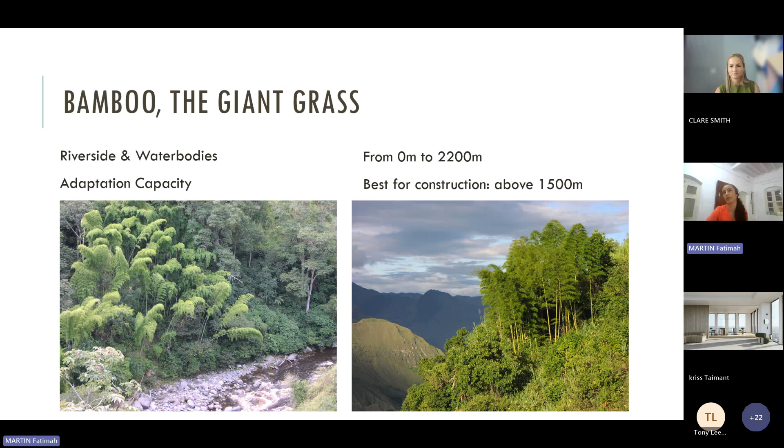As you may know, we basically find bamboo in places where there is water, either on the sides of rivers, but we also find it in many rainforests. The best bamboo to construct with is the one we find on hills above 1,500 meters. In the Mauritian context, we have basically 3-4 species of bamboo, and in the plains is where we find the most suitable bamboo for construction, even though it's a very small size.

Bamboo is distributed all over the tropical and subtropical belt. So when we think about bamboo, maybe we think about 1-2 plants, but actually it's a family that consists of more than 1,500 species, out of which around 300 we can call giant bamboo. Giant bamboo will basically be bamboos that have poles of around 10 centimeters.

So a very brief view on environmental benefits: bamboo is a champion in this. Bamboo has a very high percentage of CO2 fixation—no tree can compete with it—and in biomass production. So it has many applications for production of energy.

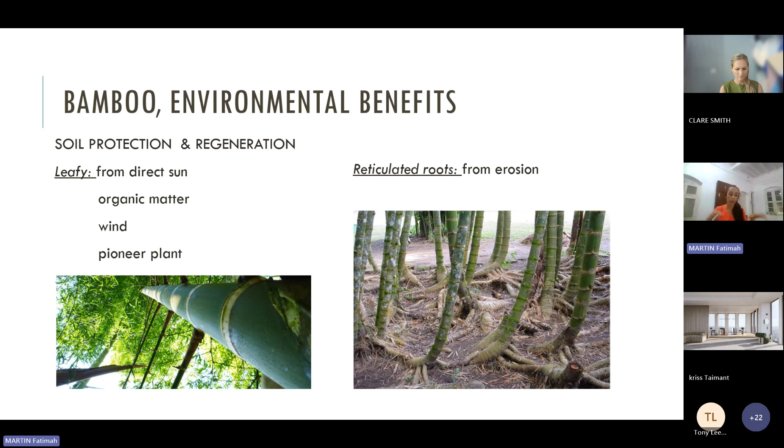Bamboo is also a great agent to regenerate damaged and eroded soils. As it's a plant that grows so quickly, it produces shade very fast, and it will enrich the soil with its leaves. It also becomes a wind protection for other plants to grow, providing this protection. It will also produce all this biomass organic matter, and with its reticulated roots, prevent erosion of soil.

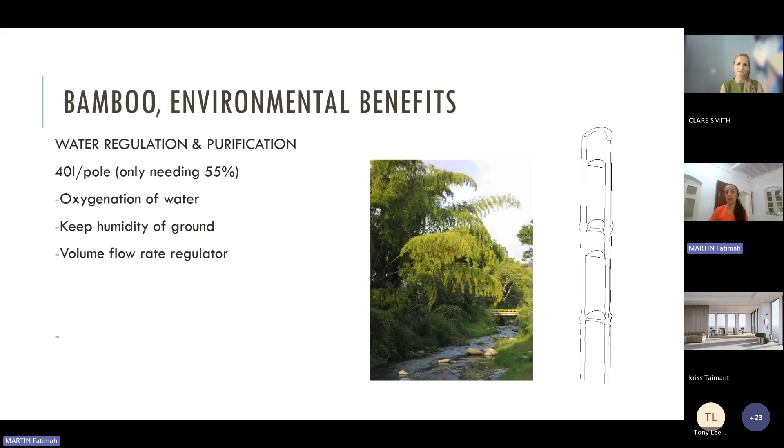It also has great properties for water cleaning and restoration of riversides. Bamboo will oxygenate the water, and unlike what some people think, saying 'I don't plant bamboo because it will absorb all the water of the ground and dry other plants' - that's a big lie. What happens is bamboo has an amazing capacity to store water inside of it. So the concept is more like you are enlarging the water retention capacity of a soil when you plant bamboo.

When we are looking at a bamboo plant, we may have a very big confusion. Bamboo is not a tree. Bamboo is a giant grass. So when we look at a picture like this on the right, we may think we are looking at independent plants, independent trees - not at all. This is a single plant with interconnected roots, and a bamboo plant can extend for hundreds of meters, actually.

We will find mainly two big families of bamboo. We have what is called monopodial bamboo, which has a linear running root, and from this root several poles will grow at a certain separation from each other. Then we have the bamboo we find more in the subtropics, the bamboo we find in Mauritius mostly, which is sympodial bamboo that grows in bundles. In this case, the roots - the rhizomes - grow against each other, resulting in these bundles. And sympodial bamboo tends to curve more than monopodial.

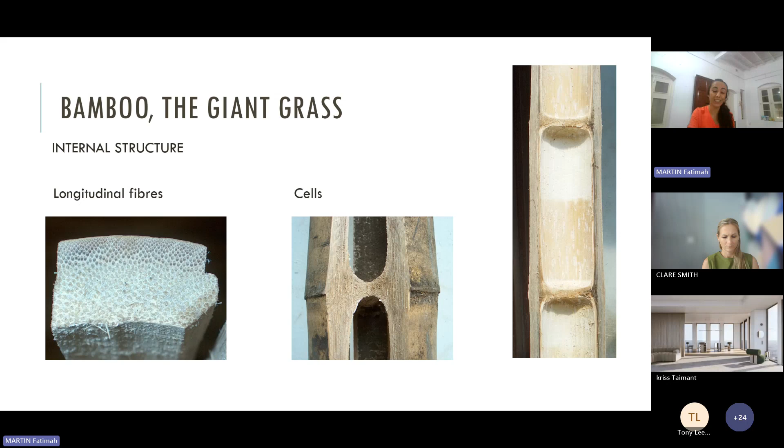In this bamboo wall, I want to show you these small black dots - these are all the fiber systems. That is the way you will realize how much bamboo is around your life. Probably 95% of your kitchen - the cutting board, or knife, or a spoon, or whatever - it will for sure be bamboo and not wood. The way you can identify it is by looking for these dot spots, the black spots, which are the fibers.

I don't want to go into much detail, but there is a certain fiber distribution in the bamboo which is not even. I've left some slides here for the record, so if anybody wants to come back to this in more detail, these are some principles. For example, we find much more fibers in the outer part of the bamboo than in the inner part.

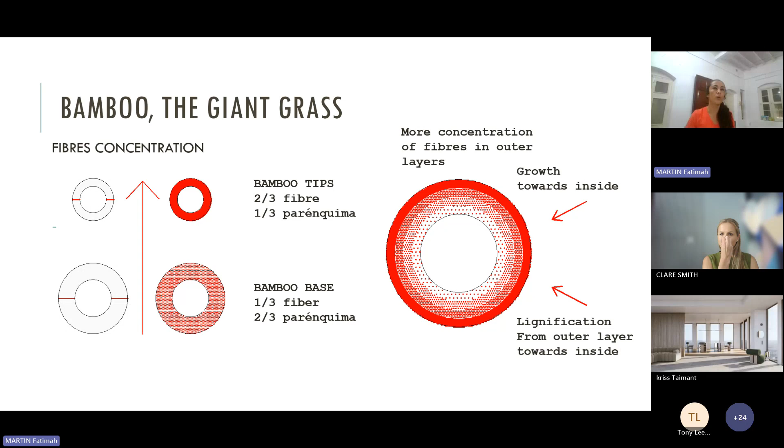When bamboo grows, basically it will grow to its full length with its final diameter very quickly, in the first 5 months to 1 year. Then it will slowly increase the thickness of the walls towards the inside until it reaches its maturity, which may be after 3 years. That is why the outer part of the bamboo is the eldest - it's the one that receives the sun, produces lignification, and you get all these fibers.

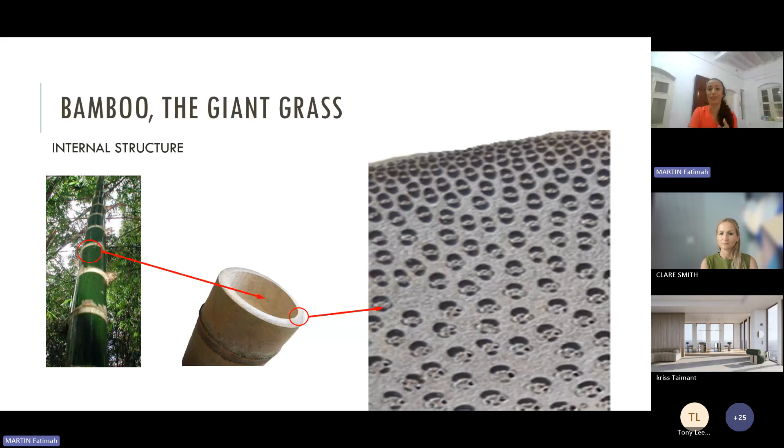That's why when you go towards the inside, when you open a bamboo, it is very soft inside and very hard outside. So we should never remove the outer part of a bamboo and remain with the inner one - that would be a very big mistake, going against the nature of the bamboo.

A big difference between bamboo and wood is this: in wood, apart from longitudinal fibers, we find growing rings—annular fibers forming circles as it grows—and medulla rays, which are basic radial fibers. So the mechanical behavior of wood is very different from bamboo. Bamboo can be more associated with metal, even a metal tube, than wood.

Having only longitudinal fibers is a very important thing. Bamboo works best at normal stresses—compression and tensile stresses that go along the fiber. So when we think about torsion or flexion stresses, those are the moments where we have to be extra careful, and where bamboo will not be as competitive as when it's working in compression or tension.

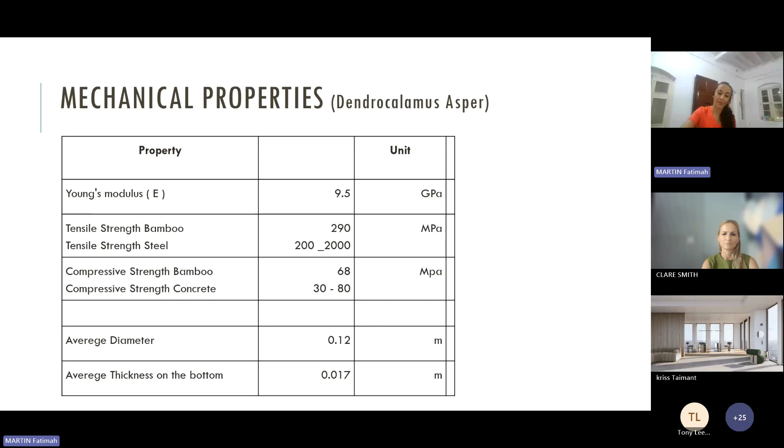I don't want to talk about the numbers again, I leave this for the record. But mainly, I want to say that bamboo, apart from its environmental benefits and its quick rate of growth, it's an amazing ally for earthquake and cyclone resistant architecture, due first of all to its flexibility.

The bamboo, due to this flexibility, is able to achieve very high deformations before it collapses. Even in case of collapse, due to its lightness, the damage it creates is much less than with any other, heavier material. Also, due to its flexibility, we can achieve in a very easy and natural way aerodynamic shapes that, as we'll see, behave very well against cyclones and wind stresses.

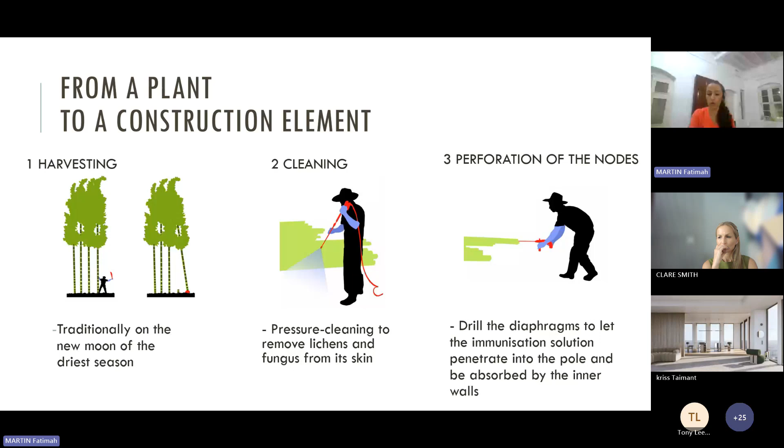When we want to think of bamboo as a construction material, first there is a certain procedure to follow. I won't get into details, but basically there are certain manners of how to harvest the bamboo. The bamboo needs to be cleaned, then treated with certain salts and chemicals—eco-friendly ones. To do so, we first need to perforate the internal walls of the bamboo, the diaphragms, making a longitudinal perforation. There are different methods.

The most common method is called the immersion method. We have a pool where we immerse the bamboo for around 10 days to 3 weeks, depending on the concentration of boric acid and borax used. These two chemicals produce a salt together that prevents the bamboo from future attacks of insects and fungus. Among other reactions, the pH of the bamboo, which is acidic, becomes more alkaline—and fungus and many other microbes will not reproduce on an alkaline medium, only on an acidic one.

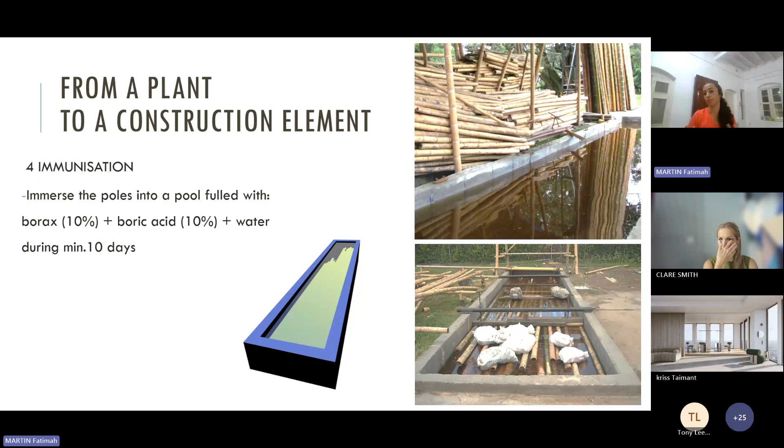So we are going to see quickly some different approaches to bamboo structures. I'll start by presenting something more traditional, in the sense of thinking about beams and columns—what we call 2D structures.

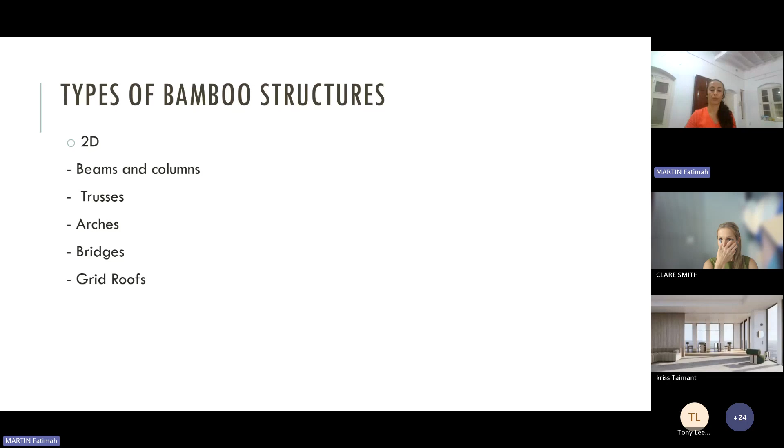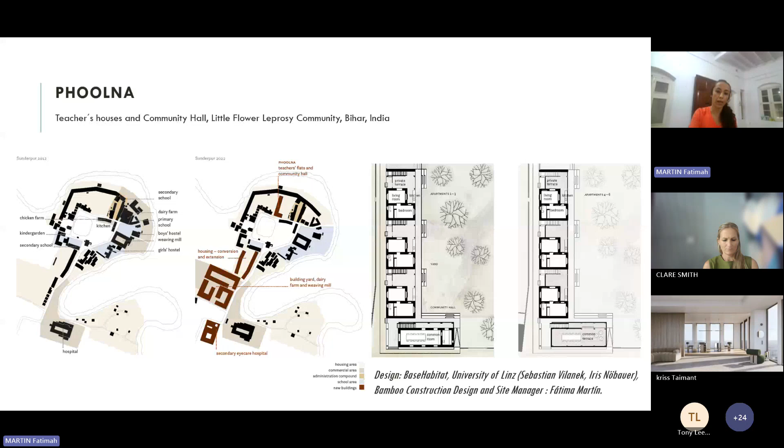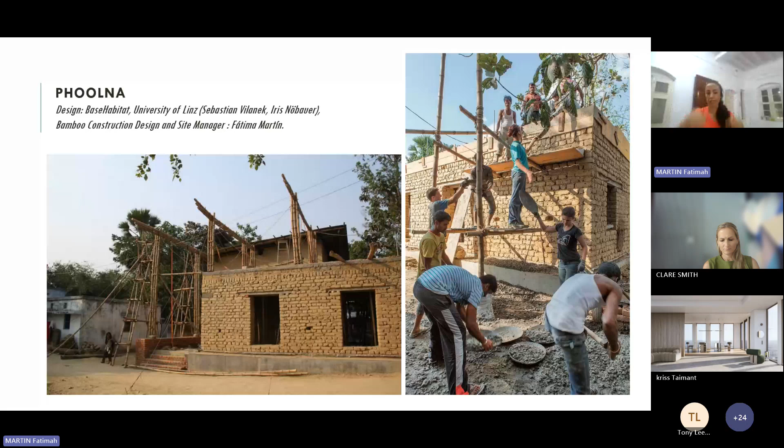This is a construction in Bihar, India, designed along with the University of Linz, with Sebastian Vilanek and Iris Nöbauer. It combined adobe bricks, as you can see, with a bamboo structure. When I say a 2D structure, I mean columns connected with beams, rafters, and purlins, as if we were working with any other material—concrete, wood, or anything else. In India, unlike in Mauritius, we need to calculate for around 100 to 120 kilometers per hour.

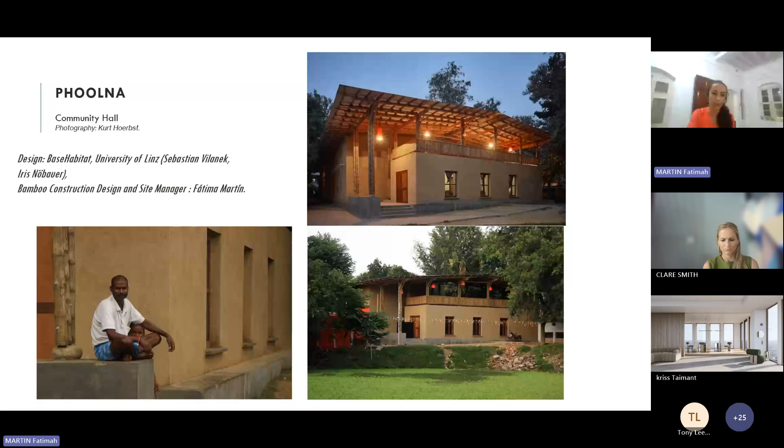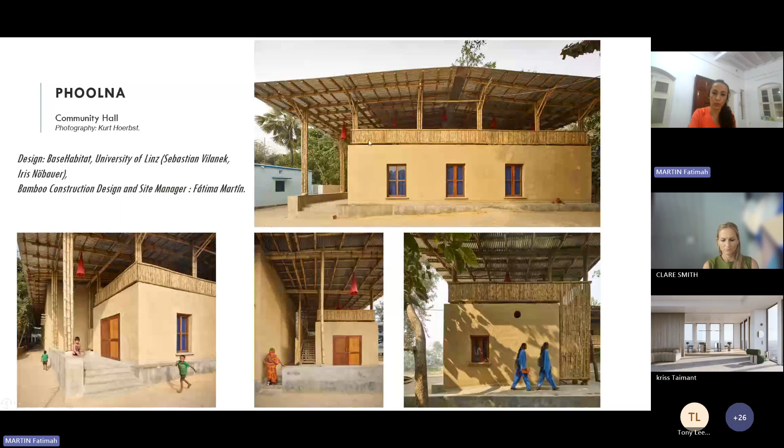In Mauritius, as you'll see later, we need to calculate for 300 kilometers per hour, so you'll see the difference between these structures and the ones developed in Mauritius. I'll move a little quickly so we have enough time to go into details later. As you can see here, I also used bamboo to make the veranda—using split bamboo—and also to do the flooring for the terrace.

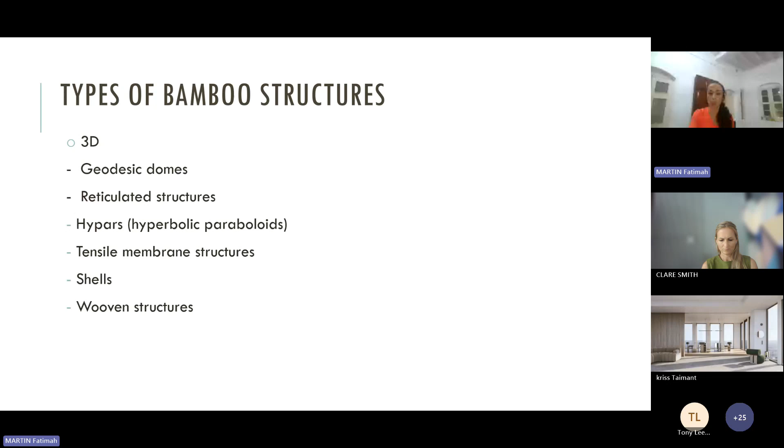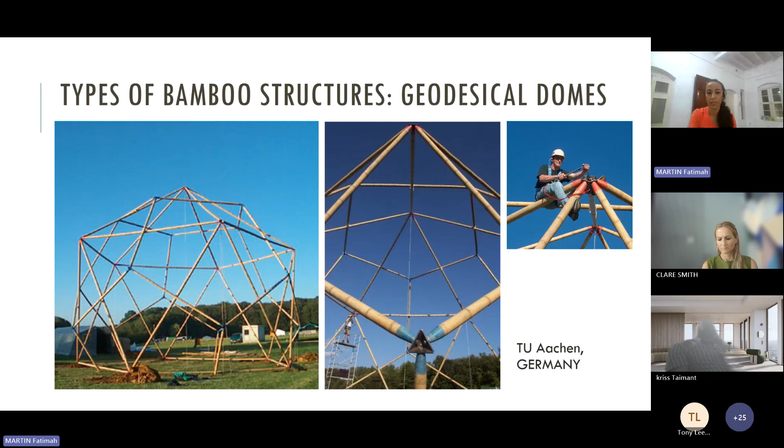So as I'm saying, we are finding many examples of geodesic domes. This is very practical to use in bamboo due to its lightness. The question here is what type of joineries, and finding the straight bamboos. Sometimes when the design depends on a bamboo being very straight, you can directly think of certain species of bamboo. And when you see curved structures, we can think of other species that grow in bundles—so we are relating the design directly to the growth of the bamboo.

We can also see many examples of 3D structures, such as hypars. Basically it's a self-supportable surface. As you can see, this is constructed on the ground, and then you just lift up the roof and make it rest on certain supports. This is also a very efficient way of constructing.

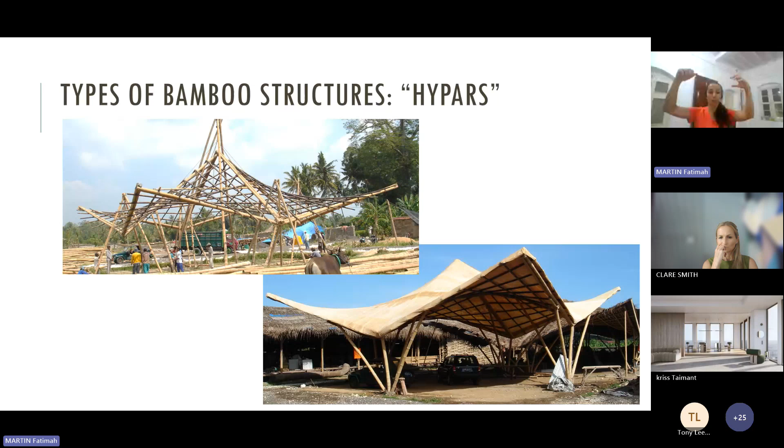Again, this ruled surface is very friendly with bamboo, because bamboo allows certain deformations—any small inaccuracies in the measures can be taken very easily with bamboo. Also, due to its lightness, it's very easy to produce a large surface on the floor and then lift it up with some poles, in very simple means.

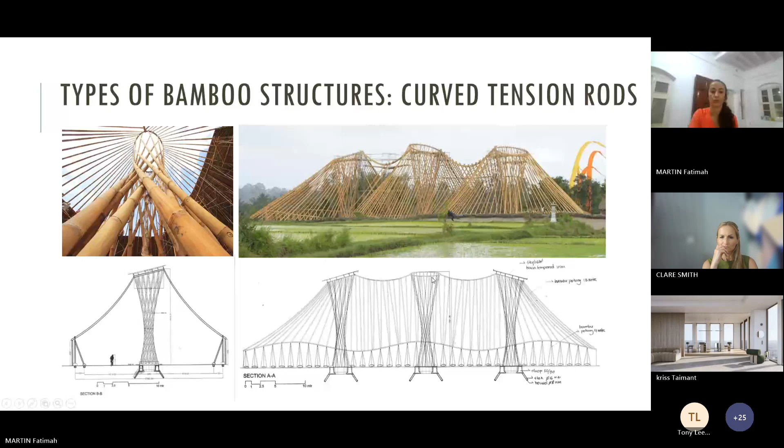Now we come to probably my favorite part, which is shell-like structures. I love to share this picture, because one of the places where I really learned bamboo was in the northeast of India. I think they are the highest experts in traditional aerodynamic bamboo structures. When I was talking about bamboo shells with them, the idea of the turtle was very intuitive, because in the Northeast you have elephants, and they say when an elephant steps on top of a turtle, it doesn't break it.

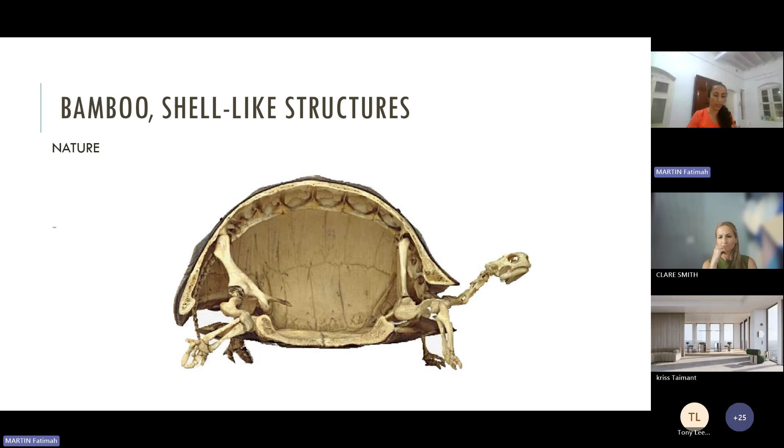So this idea of the strength of the shell is very intuitive inside all of us, especially in places where the tradition has not been lost, such as the northeast of India, where they are exposed to winds, earthquakes, cyclones, etc.

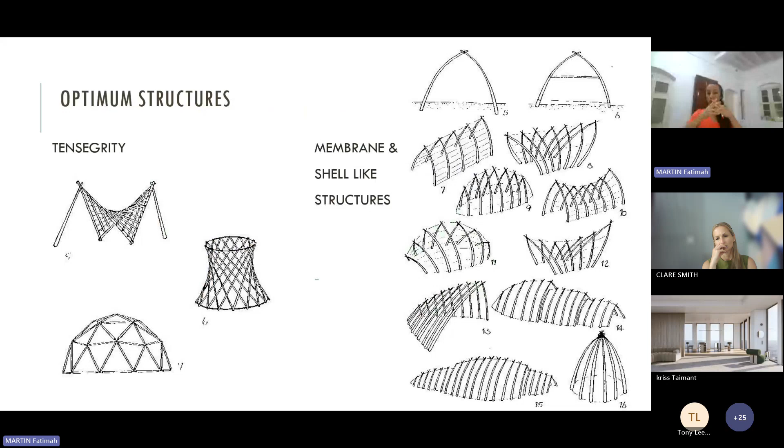So when we are talking about membrane shell-like structures, we are talking about a huge family, but mainly structures that are tied in very different directions. I'm going to show some examples. These are traditional examples—this is the eldest typology of building known.

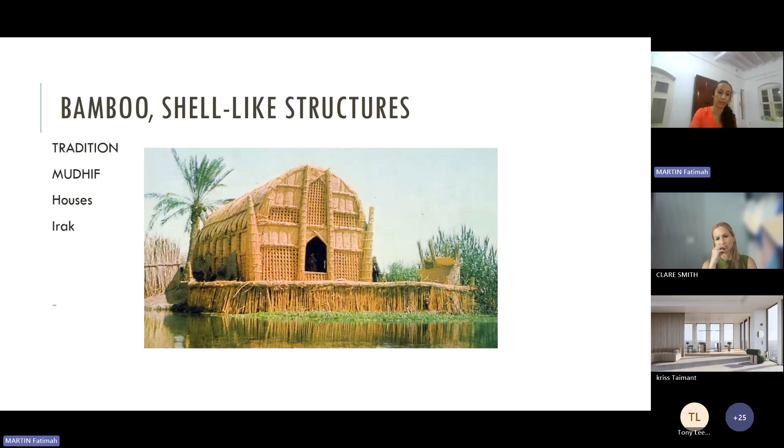These are the Mudhif houses in Iraq, and they're produced with this natural grid. This is not bamboo, but let's say cane and other fibers—we are all talking about the same big family of Gramineae, so they have certain similarities to bamboo. This is an amazing example, and I say it's the eldest tradition known.

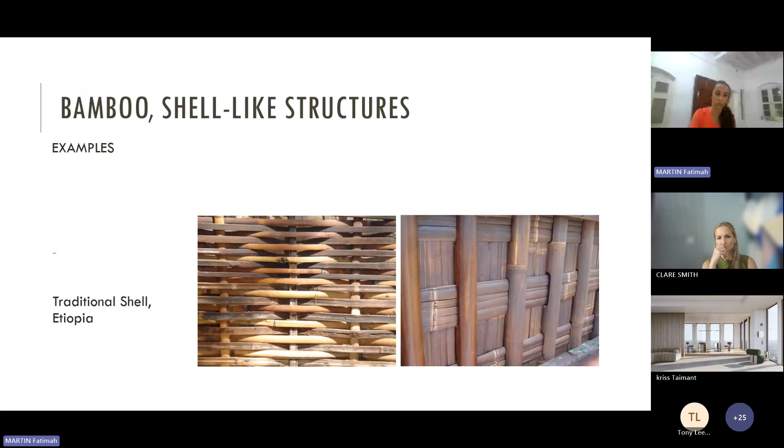We have other types of traditional constructions that used split bamboo, such as the Ethiopian traditional houses. As you can see here, it's very much a shell-like structure—we are talking as if it were a gigantic shell, a gigantic basket.

When we are talking about shell-like structures, we are talking about forces along the fibers, pure compression or pure tensile, and when we are talking about wind stresses, suction. Load and stresses are evenly distributed along the surface. We have multiple joining points, articulated joinery. We are never embedding elements when we are making a shell-like structure.

You can never consider bamboo joinery as embedded joinery, it's always articulations. And we are always constructing in different layers. We will have some main arches or a main structure which is attached to the foundation. We will have a secondary structure connecting this primary, and a third one. So we have layers of structures that result in multiple points and an interconnectedness in the structure itself.

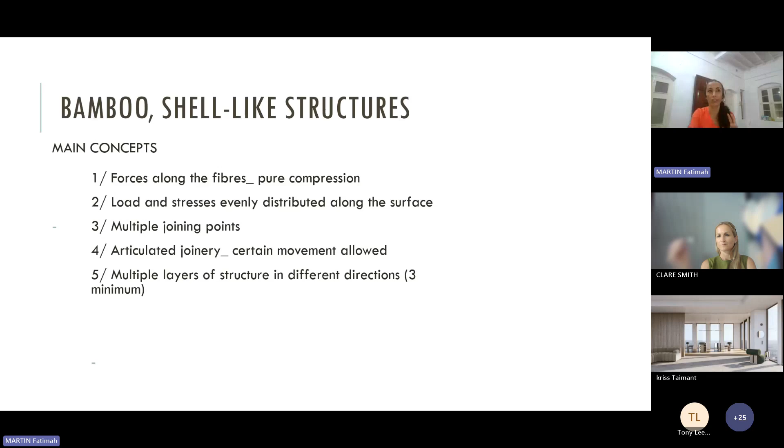It also has the quality of taking aerodynamic shapes. When we go to shell-like structures, we start to dig into these aerodynamic shapes. There's a certain principle of how, when designing a building, the response of the building towards a wind stress occurs. Depending on the aerodynamic shape, against a given force, the response of the building will be much smaller, and a lot of this energy is dissipated.

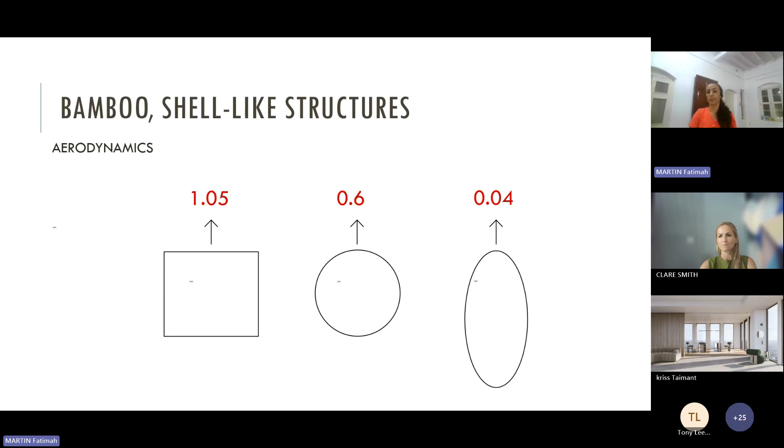When we have a flat wall, we have strong resistance. When we have a circular curve, we have much less, around 0.6. Going through elliptical shapes, and actually the ideal shape is a drop, we go through much less stress. There are many different ways in this case to produce arches that allow us to produce these shapes.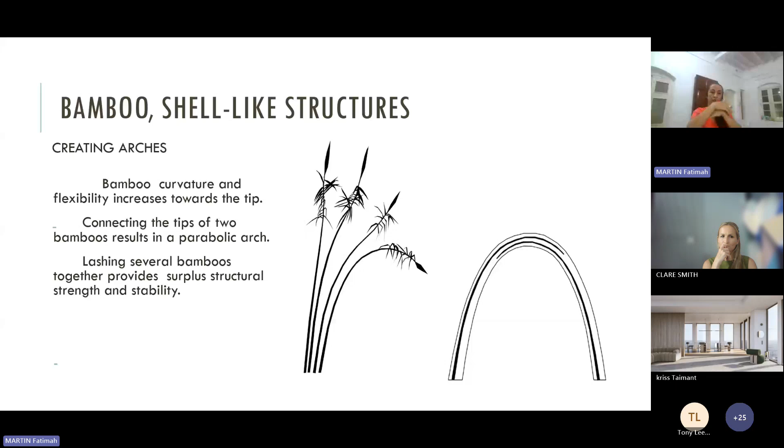One of the cases is by using the whole length of a bamboo and interconnecting the tips and bending. There are many different ways to produce these bamboo arches, as I say.

These are some of the tests I was conducting along with the group CanyaViva, where I am the vice president. We were making these tests on local bamboo in Spain at the University of Barcelona, and we were unable to break it. After 500 kilonewtons, the bamboo arch slipped from the machine, so you can see the type of deformation we're talking about before breaking. In the lab, they couldn't believe this—there isn't any other material that can take this deformation before breaking.

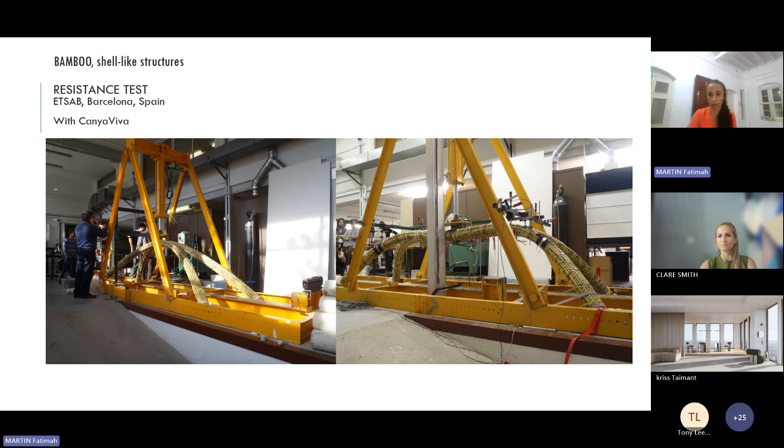As I say, one thing which is very important when understanding bamboo and understanding construction is that we cannot think about bamboo in terms of how much resistance one piece can take. It all depends on the construction technique we use—it's totally different when making arches, columns, or beams, and it depends on the type of joinery. So it's very difficult to test the material alone; we need to test samples and develop higher, one-to-one scale tests.

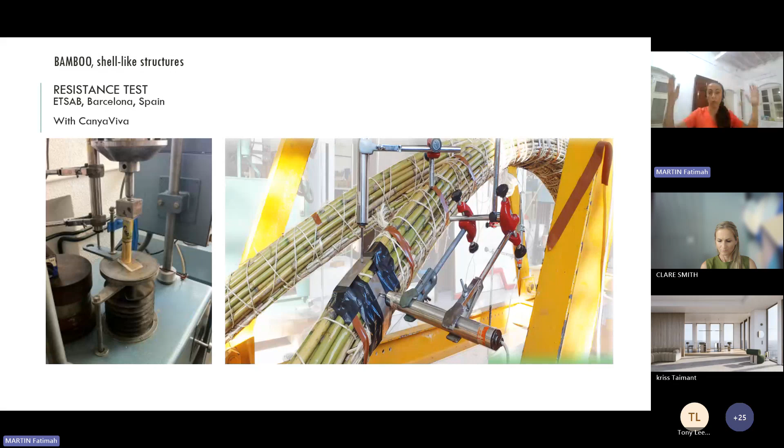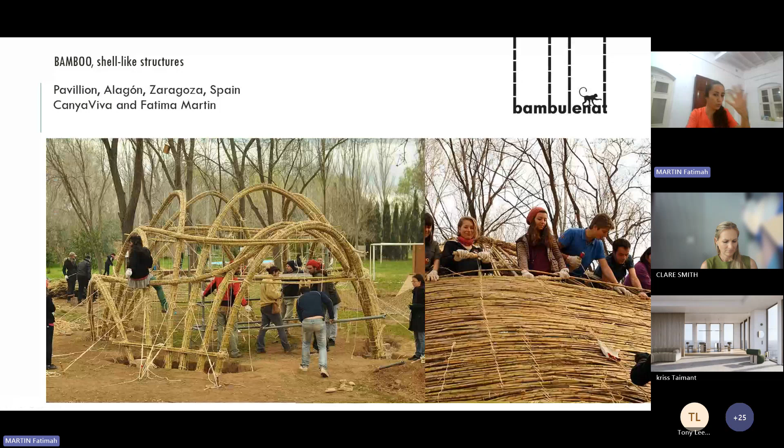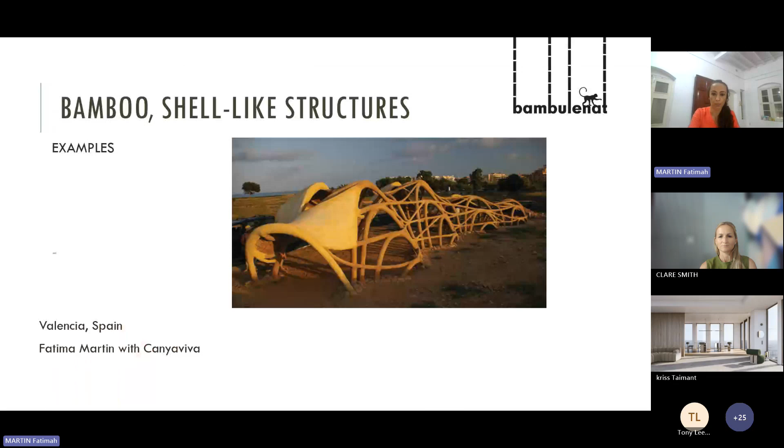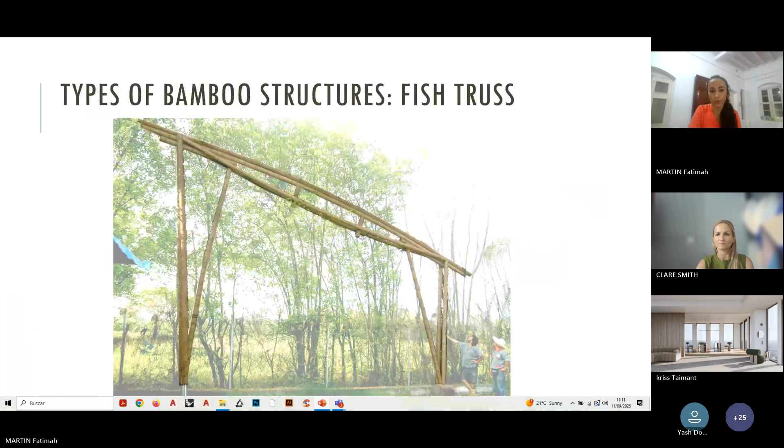Yes, we were in Nagaland, and in this construction specifically, even all the joinery was done through bamboo pegs and tying, using different tying techniques.

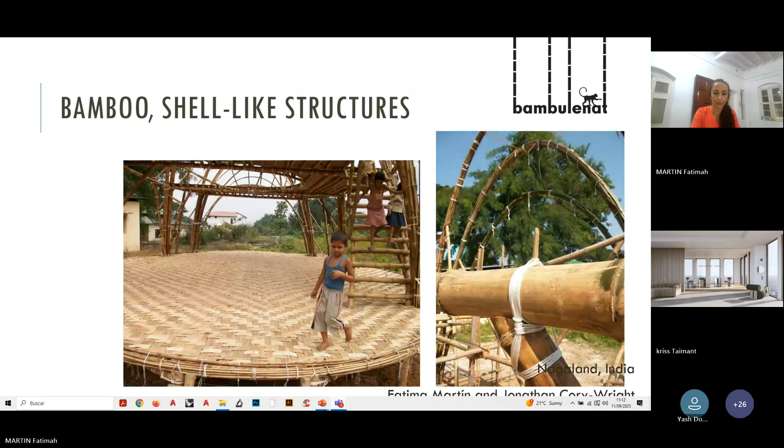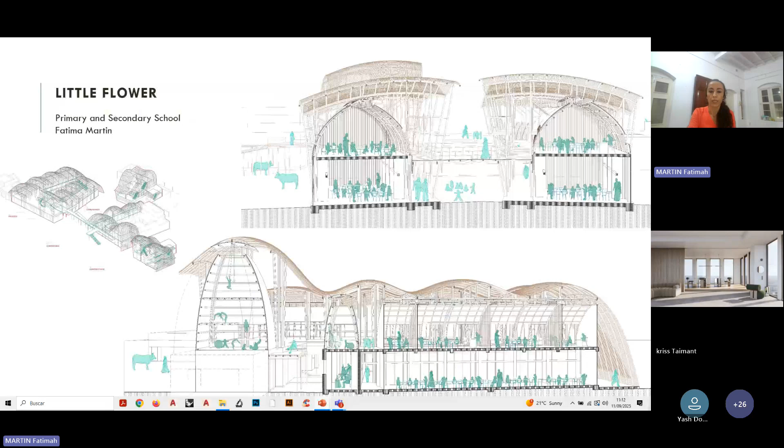A very remarkable person I cannot fail to mention is Vo Trong Nghia. For me, he's probably the most remarkable architect right now, along with Jörg Stamm, in doing very strong, resistant bamboo structures. This is a last ongoing project which I hope we will be able to finalize. It's again in the north of India, a school in Bihar.

So again, this is using local bamboos. As you can see, we are prefabricating the trusses on the ground, and then we are lifting them up.

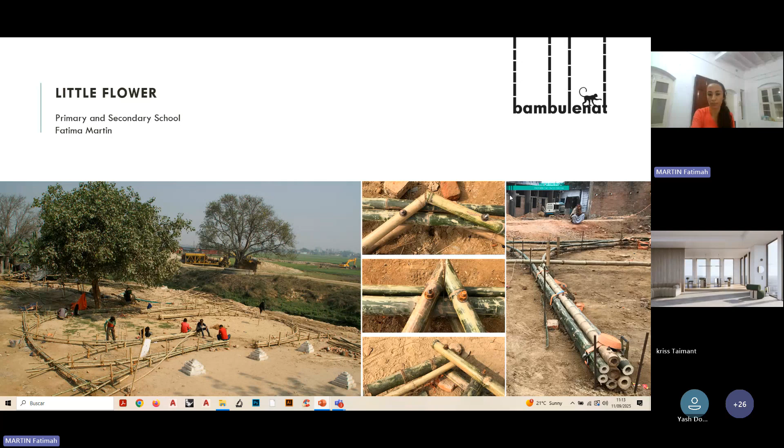There are several principles to construct with bamboo. One is that we always need to have knots on the extremes of the bamboos. The knot will prevent the bamboo from splitting, from opening. So one of the very important parts when we go to bamboo construction, apart from the design principles we talked about before, is we need to be very careful on the bamboo selection and which bamboo will be for columns, which will be for beams, depending on the different measures. We always need to ensure that all these bamboos have knots before the bases, and these bamboos have knots right after the joinery.

As you can see, these are some of the interconnecting members. And this is an ongoing project in Bihar.

So now I have my last 15 minutes to talk about the specific experience on Mauritius.

When I came to Mauritius, I was very shocked by the circumstance of having to calculate for 300 kilometers per hour. Of course, when talking to the people, everybody shared with me the concern about resistance to cyclones, and especially after the 1960s and Carol, how there was a change of the scenario into adopting concrete as the main material.

So basically I started, and COVID time was there too, so I took the opportunity to isolate myself a little from other practices in other places, and I managed to develop a certain kind of joinery that could take this load. I actually made an industrial design registration, but instead of hiding it, I want to share it with you all, and I invite all of you to please copy it and come to me, ask me questions. I am a completely open source person in this moment, and the only thing is that I am very concerned that when people adopt a solution, they copy it properly.

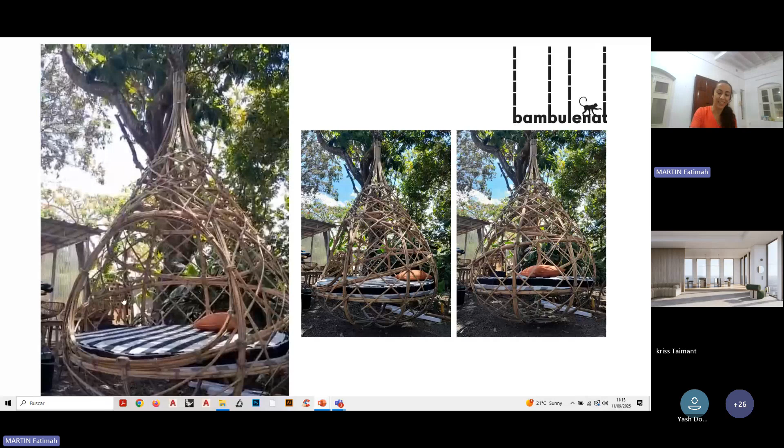Just this small note. So basically, at the same time as developing this joinery, I developed this bamboo swing, which can take a very big load. Maybe some of you have seen this bamboo swing in some festivals or at IFM.

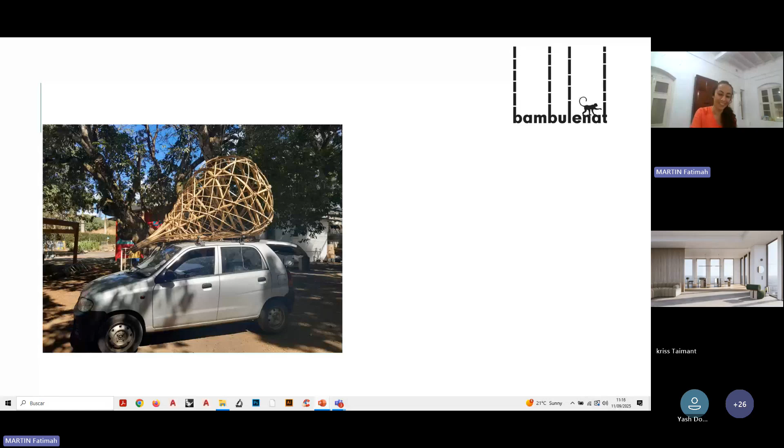This is also an example to tell you that when we are thinking about developing a product and innovation, maybe we think, oh wow, huge investment, huge means needed. I'm going to confess to you, I do not have these funds. As you can see, I didn't even have a proper truck. So this was my little car that was used as a truck, and we went through many adventures. So actually, with quite limited means, you can start doing very good research.

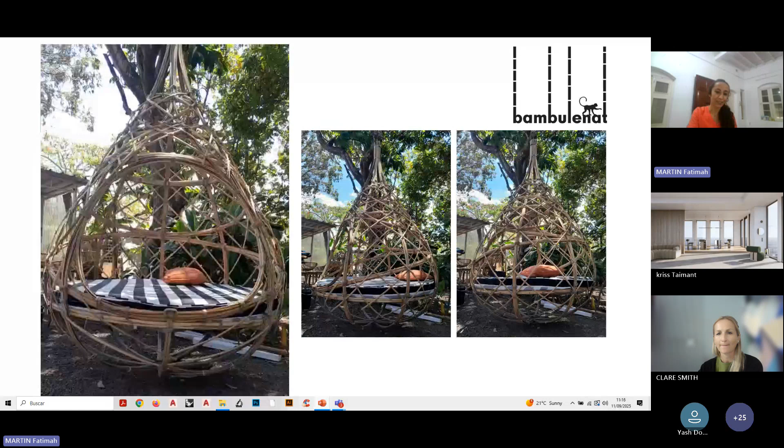I want to share with you what this detail is and what research I have done on it, and some applications. So basically, I was mentioning that we have 3 species in Mauritius mainly, and one of them is what you call in Mauritius the bamboo duchine, which is this kind of 3-4 diameter bamboo, and we can find it mainly on the higher plains of Mauritius.

I was very surprised by the capacities of this bamboo. This bamboo can grow up to 5 to 6 meters, so it can allow us to make arches that can take a span of around 6 meters, as I'm going to show you.

So basically, the joinery consists of a cylinder of wood which is perforated inside, around which we are placing the bamboos. Then we will be screwing the bamboos into the wood, and then we will use some hose clamps to tie all the bamboos together against the wood. Then inside this perforation of the wood, we can put a threaded bar or solid metal, and like that we will be able to fix it to a plate.

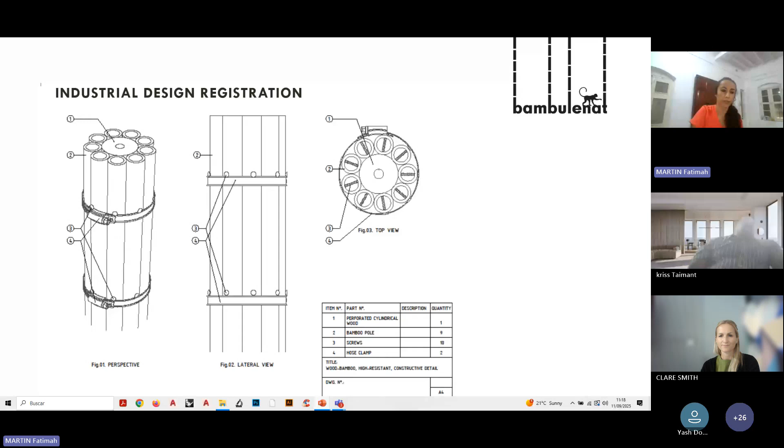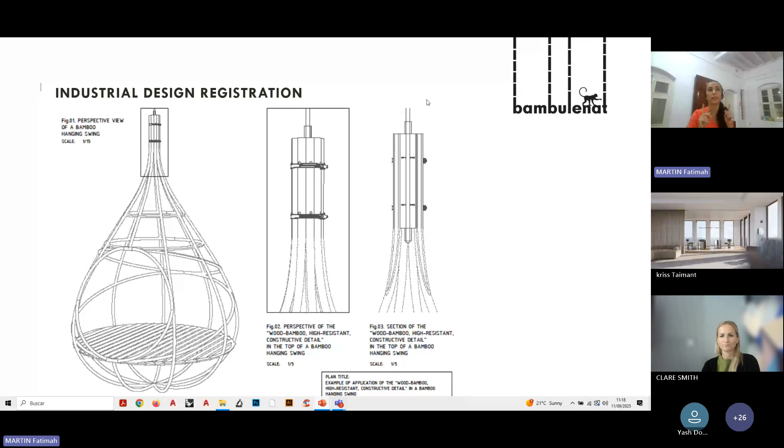I'll show you better - yes, these are the screws, the hose clamp, and how we put it together. This is exactly the type of joinery you can see in the swing I was showing you. So basically, I will have a threaded bar that I place inside the wood, with a nut, washer, and nut. Then this threaded bar can either have a hook, or it can be welded to a metal plate and then screwed to a surface. It can adopt different solutions.

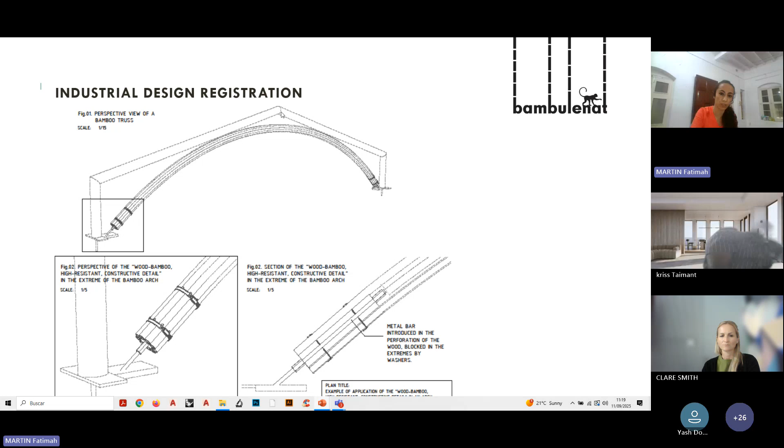This is an application of this joinery to a truss that I implemented, and this truss is a combination of small bamboo making an arch, and then this big straight bamboo. So yes, this is the joinery - sorry, I made the order wrong for some reason.

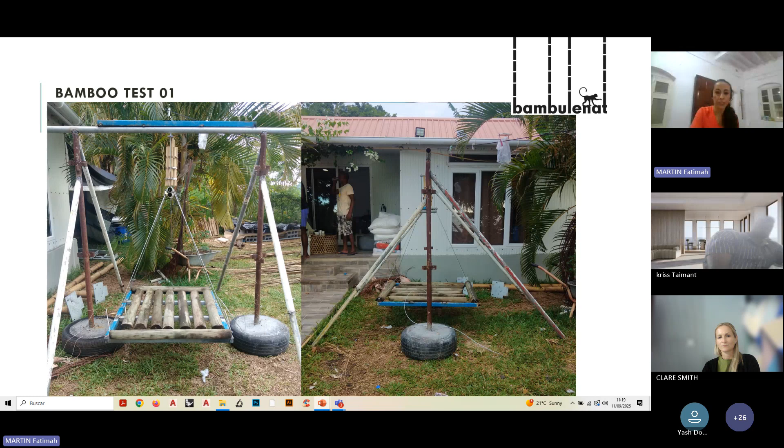So this is the first test that I made at home, actually at my house in La Gaulette, just basically with some scrap metal, thanks to the collaboration of Randy Bahadur who has constructed hands with me. We designed this device and constructed this swing.

Instead of testing the whole bundle, we just tested 2 bamboos out of it. So basically, for the 300 km/h wind, taking that these trusses or arches would be not more than 3 meters of separation and 5 meters of span, then we need to resist 2 tons of weight of stress.

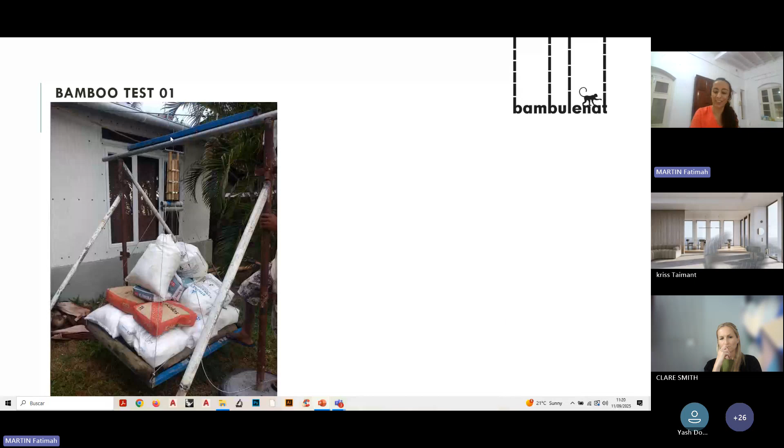So basically, in this homemade device, we were able to place more than 700 kgs, and I was not able to break the bamboo. Actually what happened is that this threaded bar of the connection collapsed. I'll show you now the other test - I still was not able to break it.

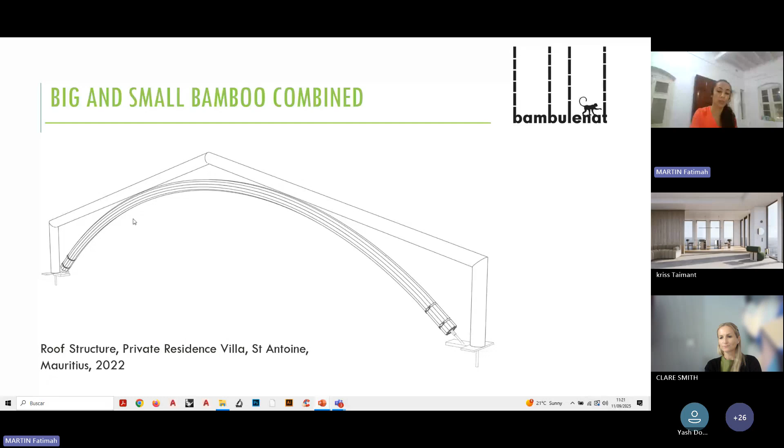Then we proceed with the first strong load-bearing construction in Mauritius, which I have done - this private residence villa in Saint Antoine.

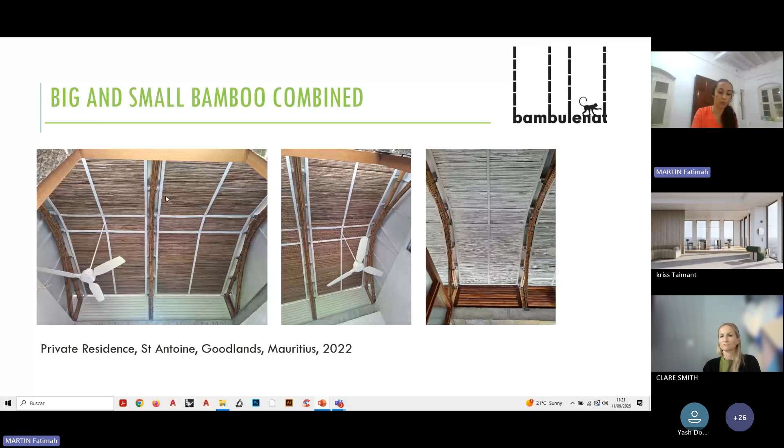So as you can see, I start by the end. These are the structural members, a combination of stone walls and a bamboo roof. In this case, the ceiling is with ravenala. And you can see the straight bamboo and the arches.

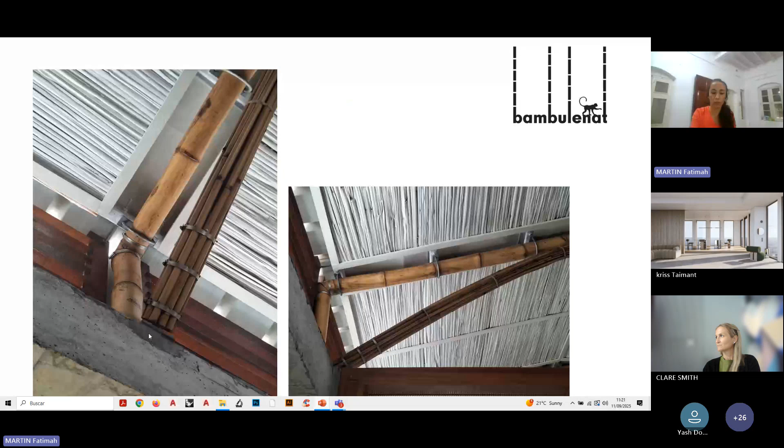You can see the joinery we are talking about and how it is attached through a metal plate to the crown beam on top of the wall. This is a span of 5.5 meters. In this case, due to some time constraints and also for the technique of the metal roof and other things,

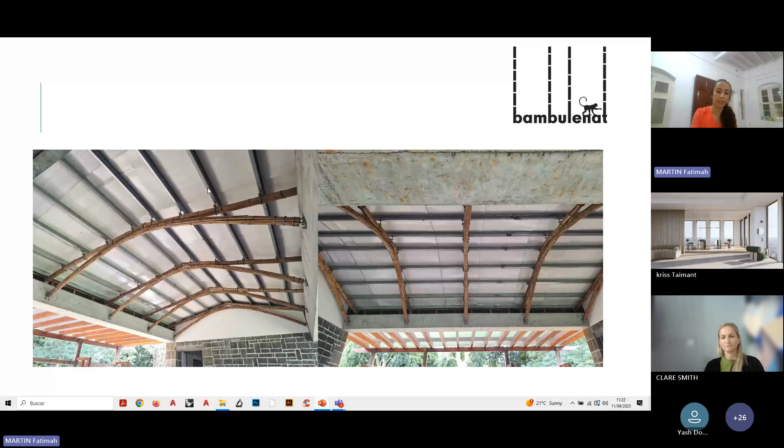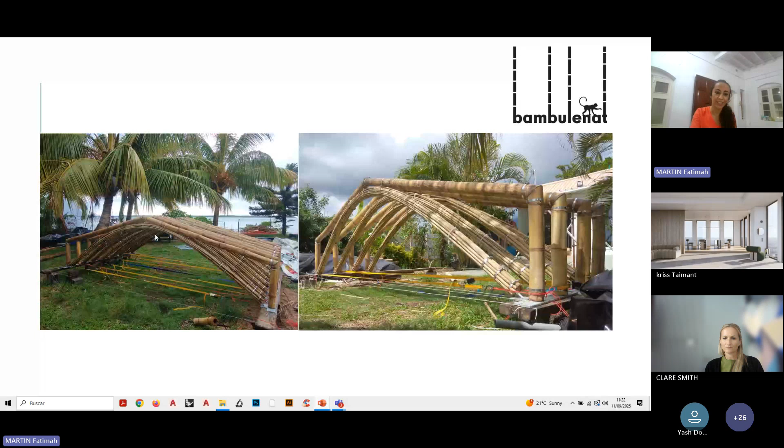we had to go for metal rafters instead of bamboo, but bamboo rafters would be absolutely not a problem. And this is the ongoing construction, and this is how it all happened in my little workshop in La Gaulette.

In this case, I made several tests. As I say, it is not about the bamboo separately, but about how we attach it, how we place it, and the interaction of the different elements. It makes no sense to break a bamboo - you will never find just a bamboo standing there on its own. The bamboo will be acting in a certain context.

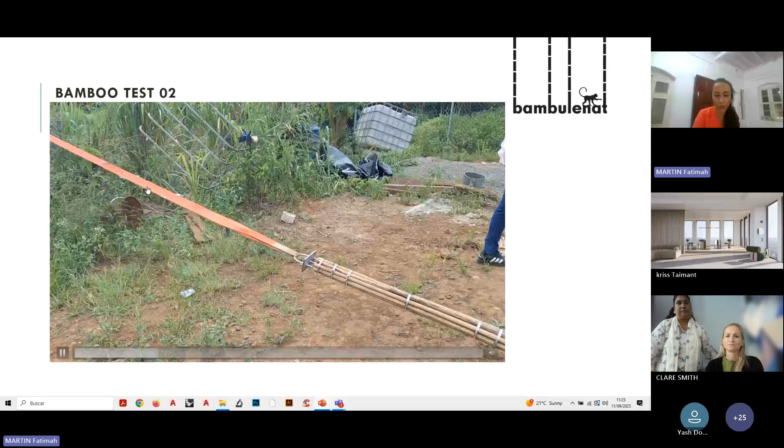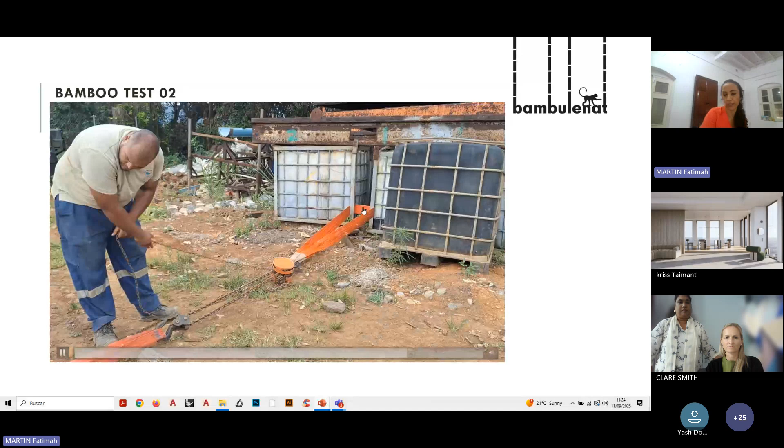So basically it consists of attaching this cargo belt to this concrete block. Here we have the sample, the dynamometer, and then again the cargo belt, wrench, and then another cargo belt attached here.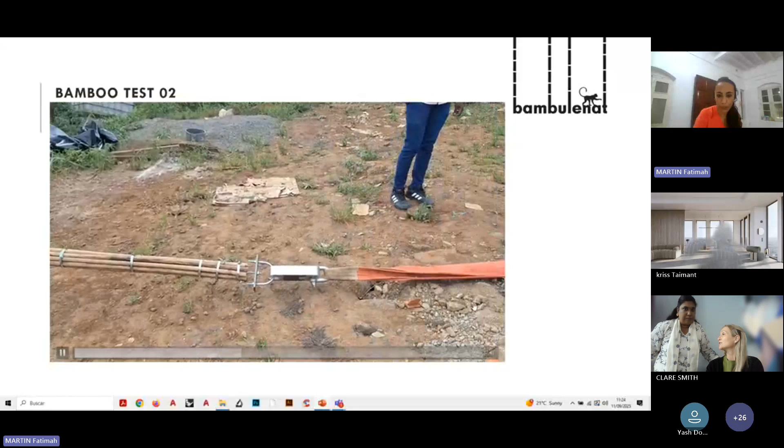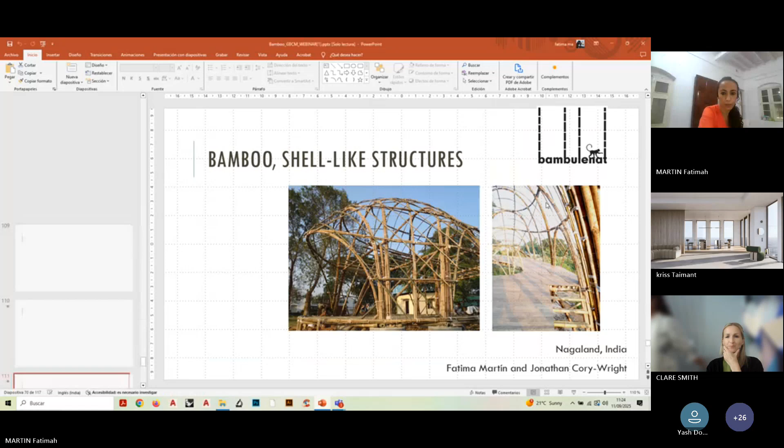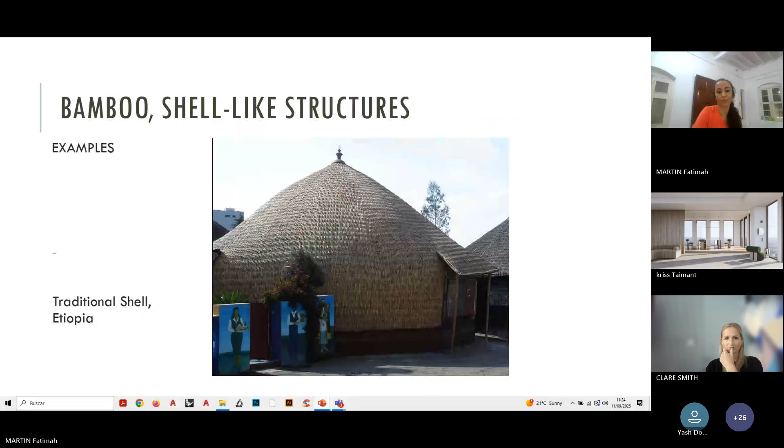So now I'll show you - oops, sorry, I attached the same video again. So this is basically the bamboo, sorry. Yes, I think we are fine. Oh, excuse me very much.

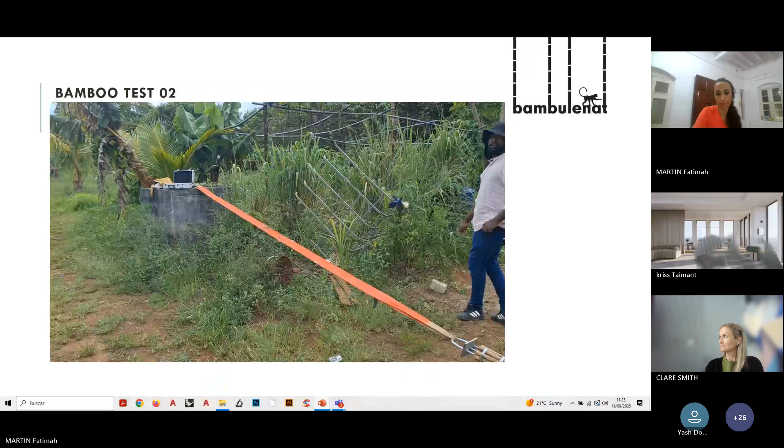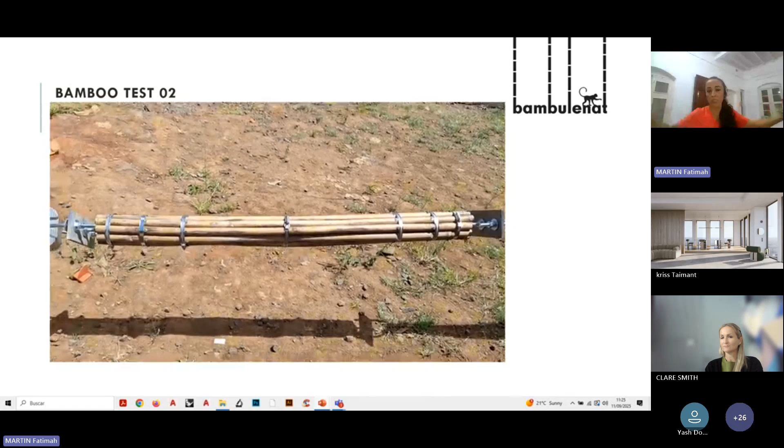So here we are seeing a first test done. And as you can see, what we are doing is basically pulling from both sides of the bamboo. So we are doing a tensile test on the bamboo, mainly.

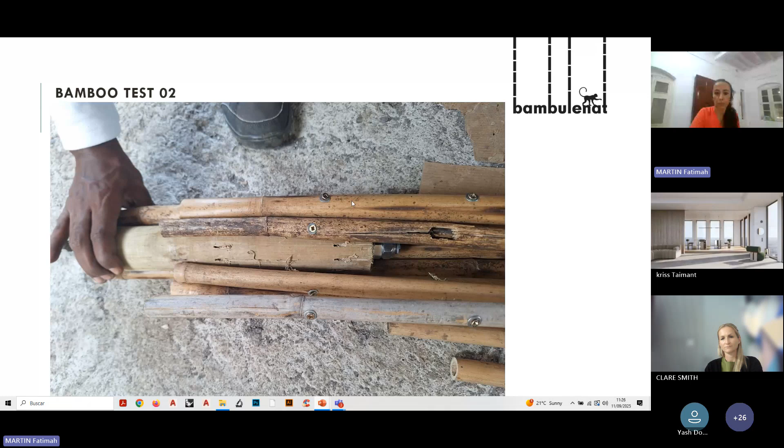Excuse me, I made - and basically what has happened in this test is that we reached 1,200 kgs, which was not too much, and then the bamboos slid from the wood. The bamboos actually didn't break, but it was the screws that collapsed. This is how, as I was telling you, with very few means, I am able to develop these bamboo tests.

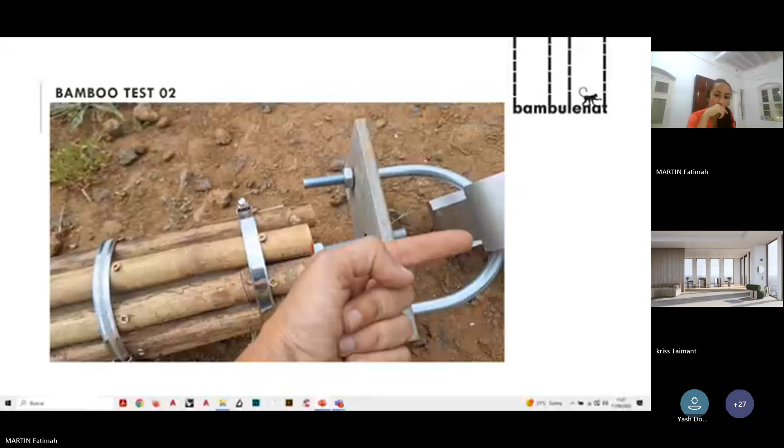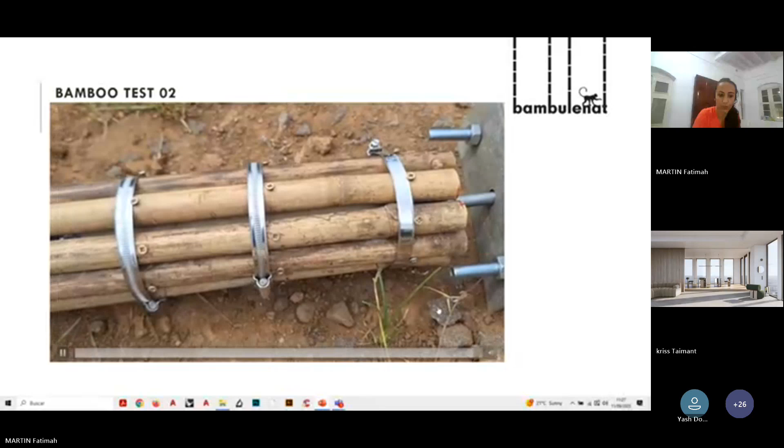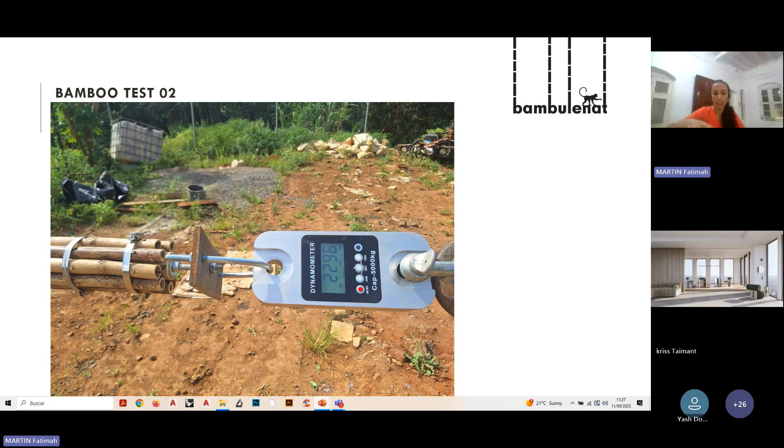So basically, what happened is that by making these small changes on the length of the screw and on the position of the hose clamp, we were able to achieve not 1,200 but 2,300. We couldn't continue because, as you can see in this picture, the metal plate was bending like this, so we had a huge risk of the metal collapsing, and actually the thread was extending. So we had to stop due to security reasons.

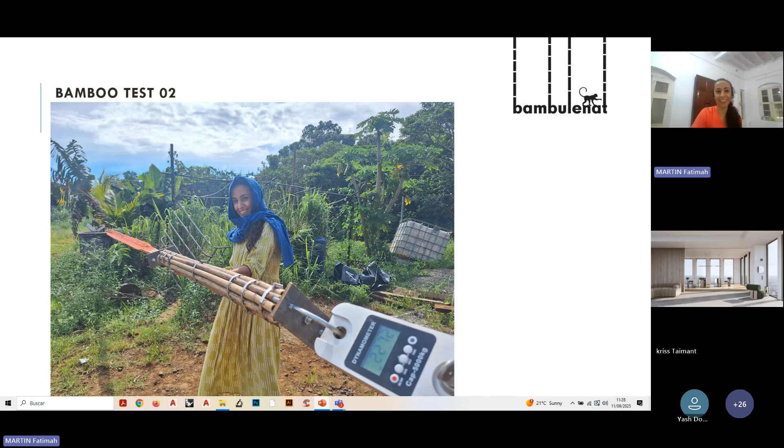Claire, you are in mute. Sorry, I just had to move. Thank you very much, that was amazing. So can we have some questions? Anyone got some comments that we can chat about?

Thomas? Yes. Hey, go ahead. Thank you. Thank you for allowing a question. I would be interested, what about the availability of the raw material? Is there enough bamboo here to scale up bamboo construction in Mauritius? Thank you.

Well, actually, that is why I started working with this small bamboo, because we have billions of small bamboos in Mauritius. There is absolutely no need to plant. From Chamarel to the plains, coming down to the eastern Rivière des Anguilles, in terms of the quantity of material, talking about small bamboo, there's a whole industry that could start right away. Then when it comes to bambusa bamboos or other more gigantic bamboos that we can find, they are very difficult to harvest because they are not really purposely planted, as far as I know. So that actually would require a plantation. But Mauritius has the best conditions for bamboo to grow, actually.